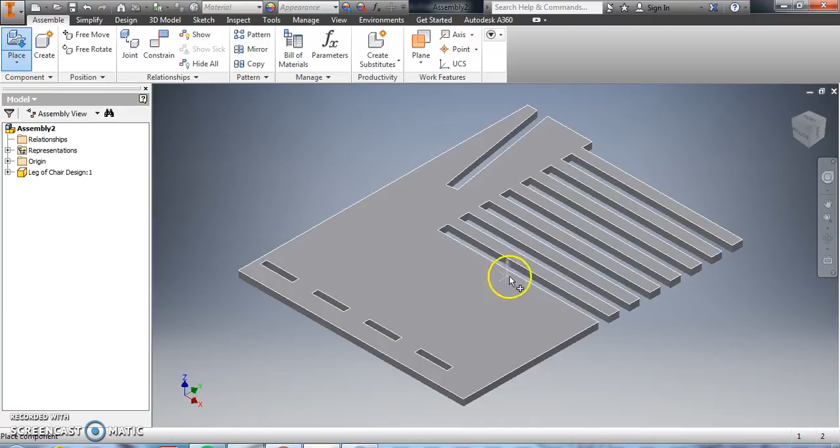Now what I recommend is that you only put in the parts initially that you need to assemble. So we need two of these, so I'm just going to drop two of these in to begin with. Now some people often put in all the parts, but then it gets a bit unnecessarily clunky and a lot in the way.

Now the first thing I want to do is set these up so that they're in line and the correct distance apart. So we'll also need the base file for that. So I'm going to just open up the base file as well from where I've saved them all on my desktop.

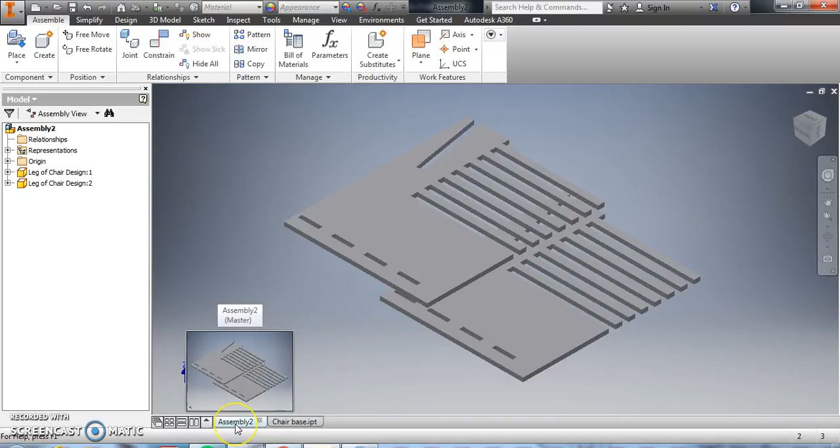Chair base, there we go. Now I'm just opening this up as a part file. Underneath we've got the chair base part and then the assembly. The reason I've done that is because I'm going to need to reference and check measurements on this chair base, to allow me to set the right constraint in the assembly.

So first of all, I'm going to check the distance that we've done this drawing in. As I can see there, it's 450. So I'm going to take a note of that. Now, knowing the thickness of the material, we actually want to be working with 430 as a distance. So we take away the thickness on each side of 10. So when we put constraints on these sides, we're going with 430 away.

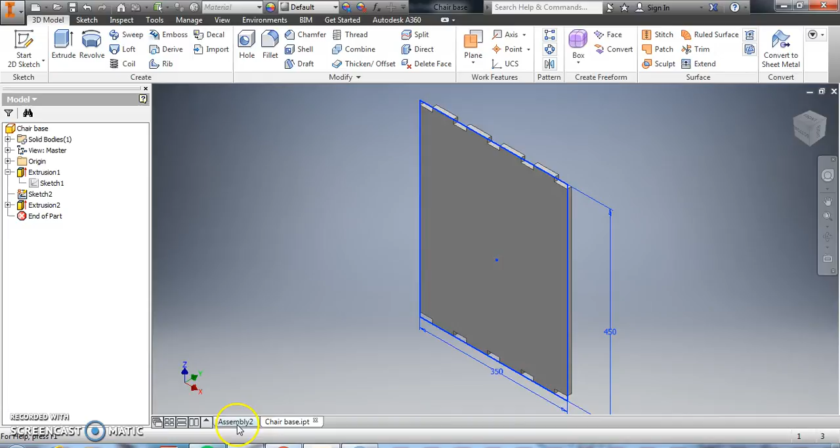Yeah, and it often requires a little bit of thought. As you can see here, this is 450 from the top points of these kind of staggered parts. So we obviously want to set the distance from here to here for the sides. As we go through, that'll make a bit more sense. Hopefully you understand them. Now again, like we do when we set dimensions, we're constraining our drawing.

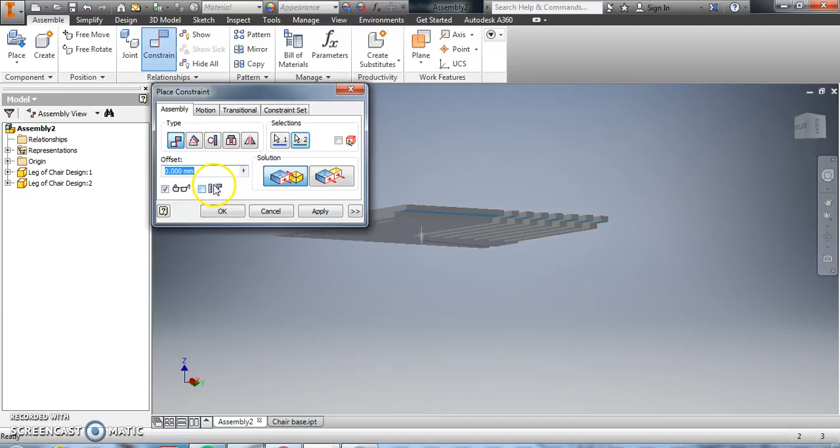So the first constraint I recommend we put on is on the inside. So we constrain that face to this face here. And then we set the distance as 430 in this box. And as you can see now, if I apply that and we zoom all, they're 430 away. Now, if we rotate that, you can see that it's pretty much in line. It's exactly how we want it.

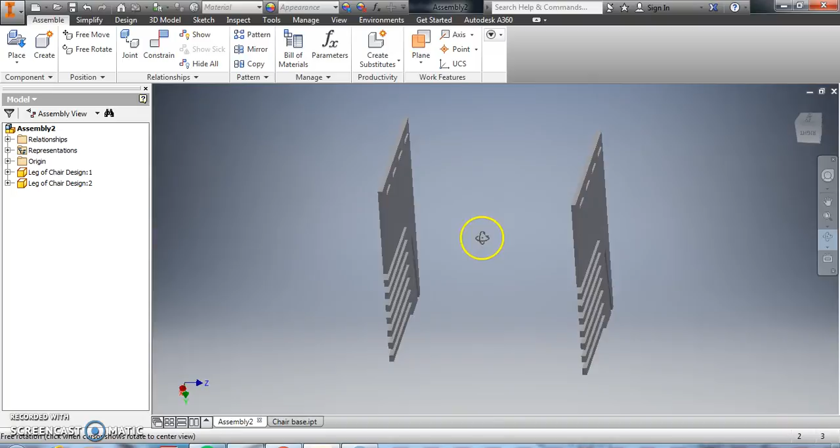Now, I always recommend to put in a few more constraints just on edges. So we want those edges to maintain and also be 430. If we try to put in another distance, which I'll show you on the next one, we also want these edges to make sure that they're staying at 430. If we try and put in a different size, so 450 for example, you'll see that it'll change in a way we don't want it to.

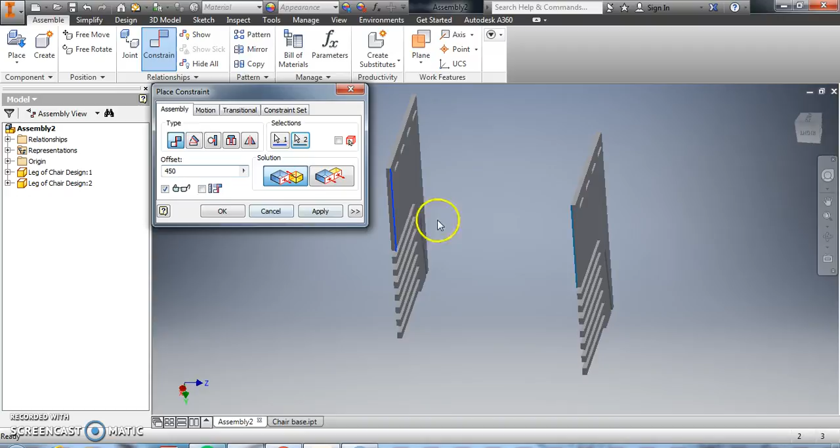So if I quickly rotate that round now, you can see there it's not quite in sync. But again, you can go to this navigation bar here, open up the constraints. I can now change that to what I want, 430. You can see it's back in position where we want it. So that's the first stage. Okay.